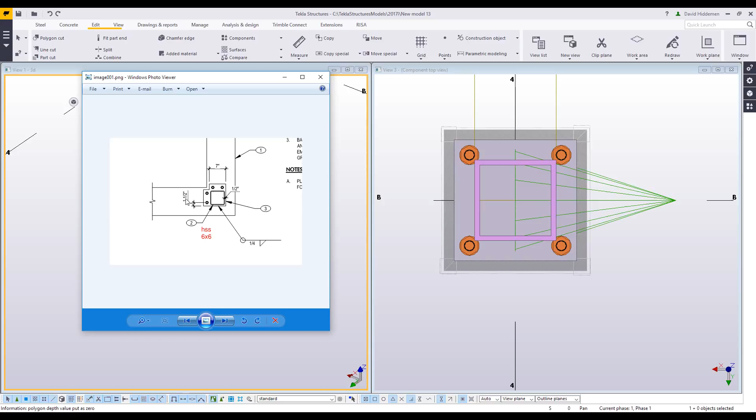So I thought this was a great opportunity to make a tips and tricks video. What I've got here created is a 6x6 column, and the base plate we're going for I estimated to be about 9.5 inches by 9.5 inches. I'm assuming the half-inch overlap is going all the way around, and the 1.5-inch edge distance from the bolts is standard.

What I created so far is a base plate 1047, installed with the default settings, with the exception of changing the anchor bolts to be a custom component. So I'm going to double click on this and set up first the base plate size. Like I said, I estimated this to be a 9.5 inch by 9.5 inch plate, so I'll make that adjustment first and then modify the component.

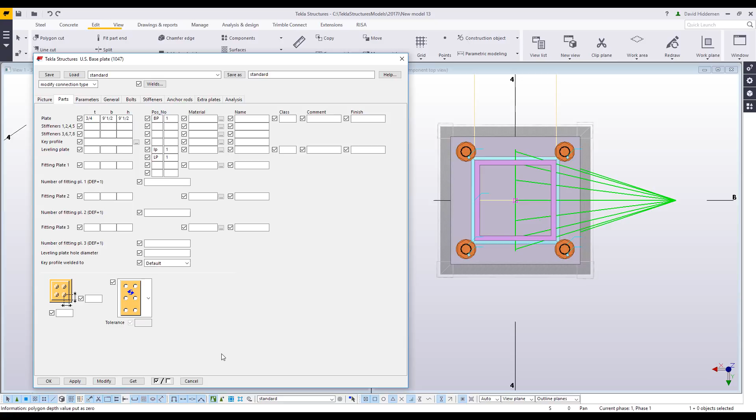Next, I want to set up my number of bolts. To do this, you have to start by thinking of these bolts as a rectangular array. If I bring this image back up, we can see that working left to right, I have 1, 2, 3 rows of bolts, and working top to bottom, I have 1, 2, 3 rows of bolts. That's how you first set this up. I'll say I want 3 rows of bolts in either direction, and modify it. Now I want to set up the spacing of these bolts.

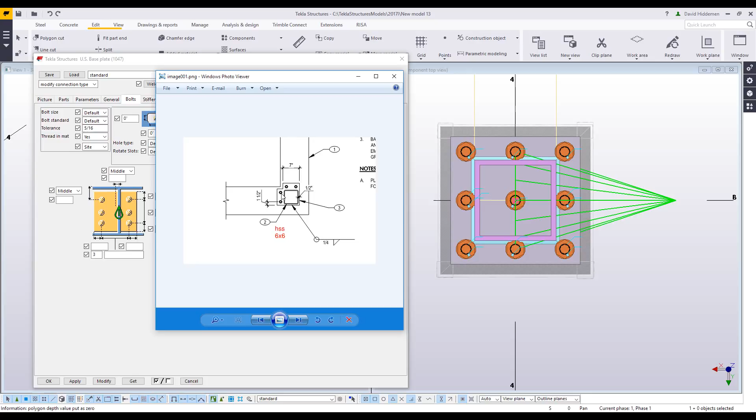Going back to my picture, if I have a 7-inch wide leg on this base plate with a 1.5-inch edge distance, that gives me a 4-inch spread. Based on how much extra we've got, I'm figuring about 2.5 inches to get to the next row. So I'm going to go with a 2.5-inch, then 4-inch spacing, another 2.5-inch, then 4-inch spacing. When putting in values in a distance list like this, make sure there's a space between them so Tekla can recognize them as separate values.

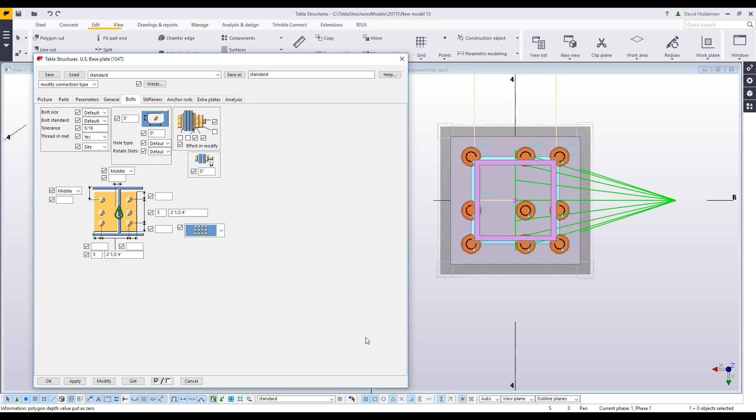So I'll modify the component, and you can see how they're starting to take on the shape that I need. Here are the 2 bolts on one of the legs of the plate, and here are the other 2 bolts of that leg, or the other leg on the other side.

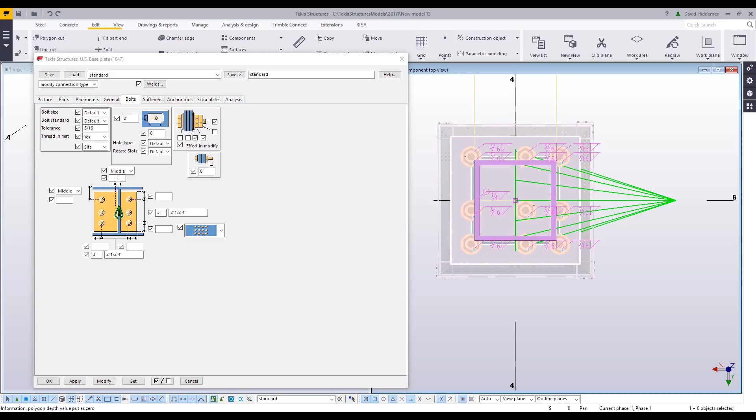Now what I can do is offset these, because the current array is centered on the column. So what we want to do is offset this. This could probably be figured out using math, but I'm a little lazy and like to just do trial and error here. So I'll start putting in numbers and modifying and seeing what I get. So I just set an inch.

Maybe I'll come up to my measure tools and start measuring the horizontal distance. I know it needs to be centered here. Right now I've got 2.25 and 1 3/4. Well, that's pretty obvious - if I want that centered, I need to move it 1/4 of an inch. That's probably the same on this side as well, so let me measure that. That's 1 3/4 and 2.25, same thing. So I'll adjust this value up to 1.25 inches and modify.

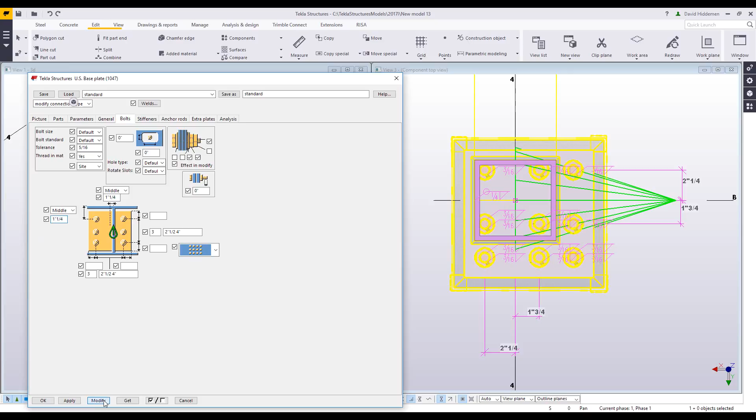Now we should be able to see that centered on that column. I'll measure one of them just to make sure - 2 inches. Okay, I think we're good.

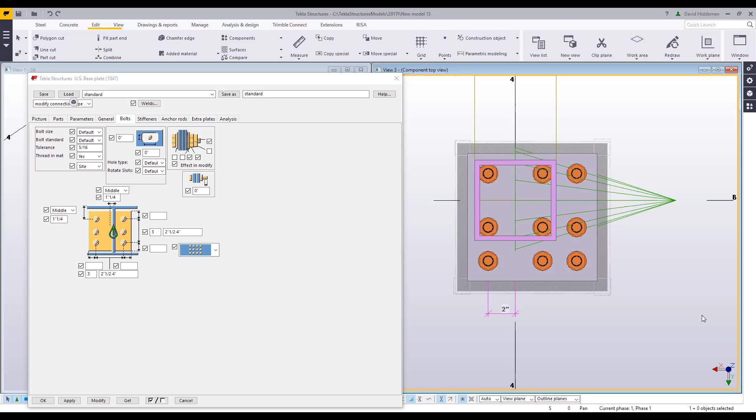So now that I have the bolts oriented correctly, offset properly - and that might take a little trial and error to get there - you want to remove the extra bolts that you don't need. I don't need this outside corner bolt, and I obviously also don't need the ones inside of the column. So in order to do that, we have to go back to the Parameters tab. There are 2 options for removing bolts: one called Eliminate Bolt Numbers, and one called Eliminate External Bolts.

Now personally, my experience with Eliminate External Bolts is that it's not very reliable, so I tend to not use it. You can try it if you like. But the eliminate bolt numbers option I have a lot of luck with.

The idea here is that each of these bolts has a number associated with it. So one of these bolts is bolt number 1, then bolt number 2, then bolt number 3, and then it goes back and says bolt number 4, 5, and 6. Now that may not be the orientation.

So in order to find the orientation, what I'll do is put in 2 numbers to start with. I'll say get rid of bolts number 1, space 2. That'll get rid of the first and second bolt. And when I do that, I can see that the first two bolts on the right side over here have gone missing, so that tells me that's bolt number 1 and 2.

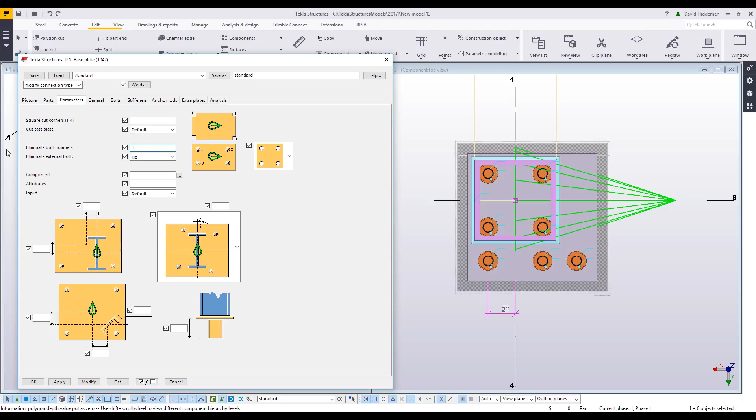So that's what I'll type in here: get rid of bolt number 3, space 4 and 5, and then keep 6 and get rid of 7 and 8. So I'll modify, and we can see how it gets rid of that corner bolt and gets rid of the internal bolts while keeping the bolts that I want.

So the final thing I need to do is cut that corner of the plate away that we no longer need. First thing I like to do is come back here to the picture tab where we have the corners of the plate. There are dimensions for how big that clip or how big that notch should be.

When I'm looking at a component like this, I try to follow the cone direction in the image. So if my cone is pointing in this direction, as it is in the model, my first attempt will be to try to match that up. So in that case, that would be this corner here that I want to get rid of.

So I'm going to go ahead and type in 2.5 inches and 2.5 inches, and I'll modify. See if I got the right corner, which I did. You can see that it's currently a 45-degree cut because it's the same dimension in both directions.

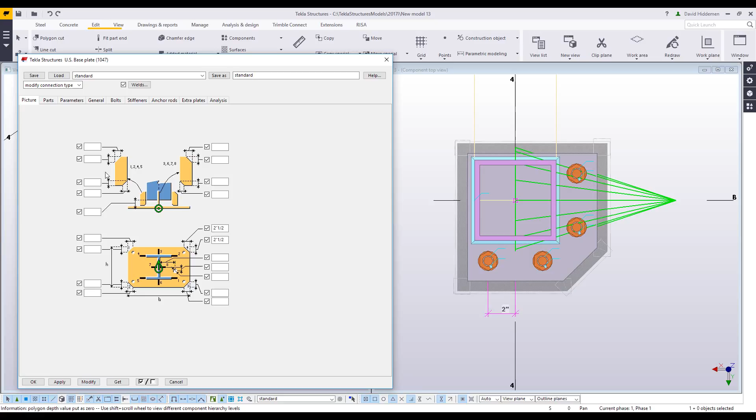And then I need to go back to the parameters tab, and I need to tell it, don't just cut that corner, but make it a square cut, which is the very first option up here at the top.

Now again, when I come into a component, I'm not quite sure which corner is which. What I'll usually do is follow the cone. It's not always 100% reliable, but that's where I'll start. So in this case, I'll say, all right, let's try number 3 for my corner cut, and I'll modify. And I didn't see anything happen, so that tells me that's not the right corner.

So instead, I'll go and try corner number 4, which was the same corner on the first tab. And now we can see that we have a corner clip.

All right, so one of the last things you might take into consideration is the rotation of this plate. Now, I could just adjust my values, adjust my numbers to get this to change to different orientations. That's not always the easiest thing to do. Sometimes you just want to rotate it.

Now, you can do that right here on the Parameters tab. You just want to make sure that you have the right option chosen here, so you want to choose not just to rotate the bolt group, but to rotate the entire plate. And then you can come in and type in something like 90 degrees, and you'll go ahead and rotate that plate by 90 degrees or 180 degrees or wherever you're trying to get with it.

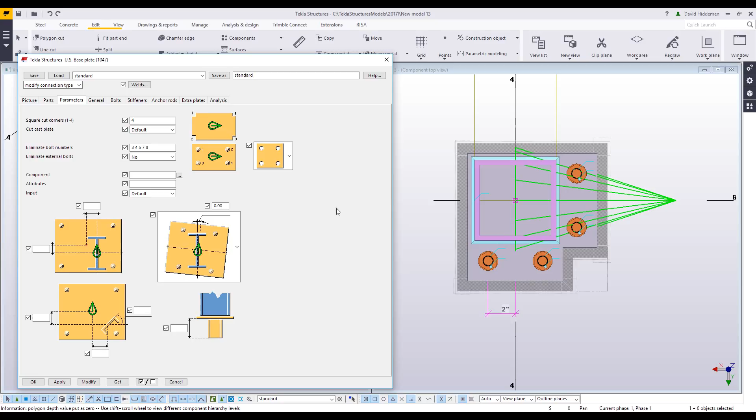Now, one last thing. If you're in the U.S. Imperial environment, we do provide a couple of examples for you. If you go to your drop-down menu, you should see a corner base plate with holes, with L-shaped rods, and then with straight rods. So you can always load one of those as a starting point and then tweak it from there. But hopefully this video will help get you on the right foot as far as which options to change and how those are going to affect things.